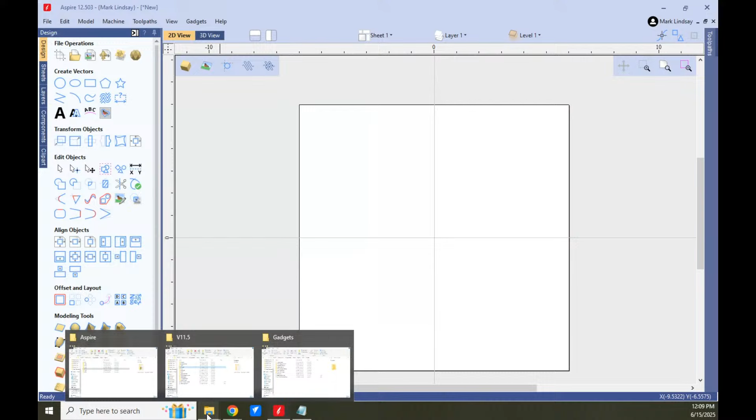I'm going to go to downloads, and there are a bunch of my... let me get down to them here. Come on, get down to them. There's one there, the square around gadget. There, I've got the install file here in my downloads folder.

So what I can do is go up to gadgets, install new gadget, and look, here are a bunch of the gadget installers that I have. Let's take a look. Let's look at the gear maker gadget. I can click on that, click open, and it's going to give me a license agreement for that gadget. I'll click agree, and it's successfully installed. Now close that. I come up to gadgets, and there is the gear maker.

Now, you were looking for the spirograph, 8th sinner. I can go over to the gadgets library, gadgets.vectric.com, and that's going to take you to the main library, and you'll choose, like in this case, version 12 library. Now I can scroll down and look for various gadgets right here. There's the square around gadget. Let's see, there are some others here. But you notice there aren't many gadgets here.

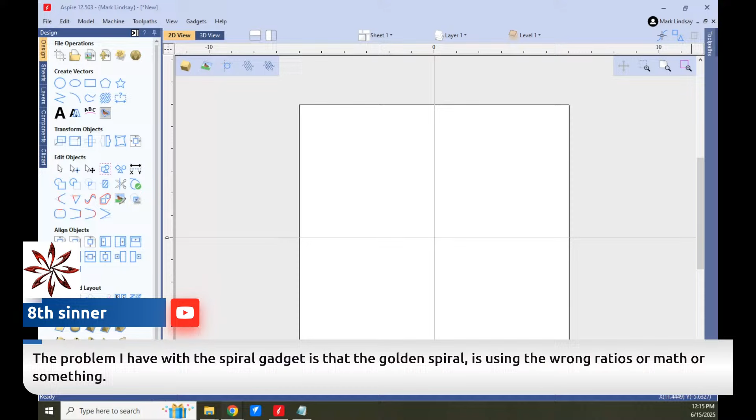8th sinner says the problem I have with the spiral gadget is that the golden spiral is using the wrong ratios or math or something. Yeah, that is something to talk about. Get into the gadget forums, the gadget request forum, and mention that. They can't fix something if they don't know it's broke.

I agree, the spiral gadget could be a little bit more clear on a few things. For instance, it's kind of hard to get an exact measurement, I'm using my hands like you can see me. Let's just go get it. There's the spiral gadget right here. It's very difficult to create a spiral with a specific spacing between each of the loops, and that should be an option added to the gadget. So, oh well, what can you say?

We have another question here from Butch Miller. I'll lead off with a version 12.503 question for when things get started. I see a shadow box at the bottom of the screen in the 3D view with instructions and a question mark at the end. How do we get rid of that?

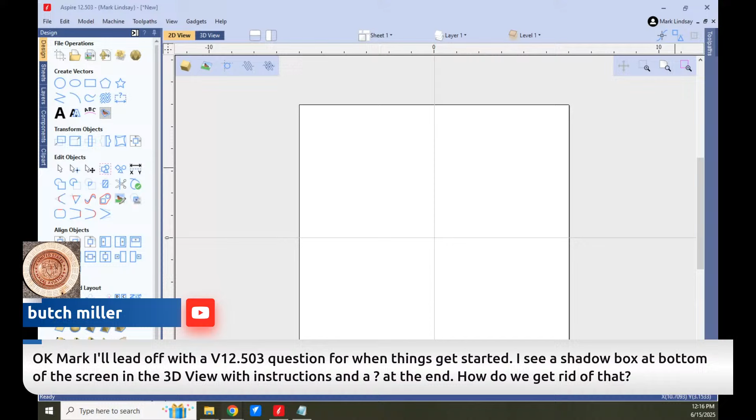Well, Butch, what you'll do is come over here to the 3D view, Butch is referring to this panel right here. Click on an object to select, click again to transform. Yeah, there are all kinds of different instructions down here. What you'll do is put your cursor over that question mark, and right here it says toggle prompts. Click on that, and everything is gone except the question mark. This is here for convenience.

If you are using a specific tool, let's go over here to the circle tool. You can view that selected tool's documentation by clicking this link right here, and it opened a browser page to the draw circle category. So if you have an issue and you'd like to explore this tool further, that's how you would go about it. You can view the selected tool's documentation by clicking on that little link right there.

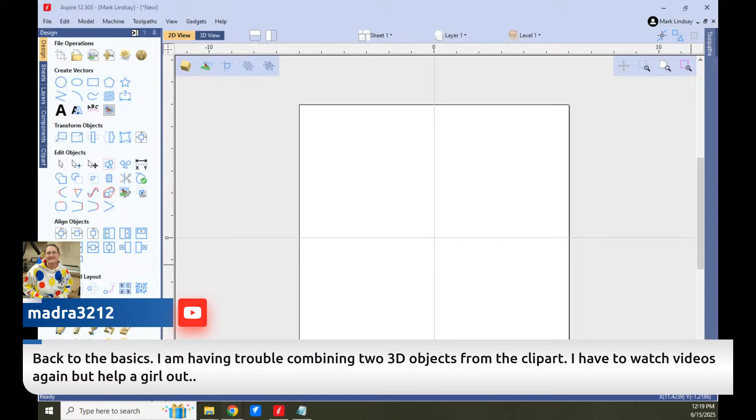Now we got Ellen asking, back to the basics. I'm having trouble combining two 3D objects from the clip art. I have to watch videos again, but help a girl out. Okay, Ellen, more than happy to, but help a brother out. Any two 3D components in particular, or are you talking about just in general? Because there are a lot of ways to combine clip art elements.

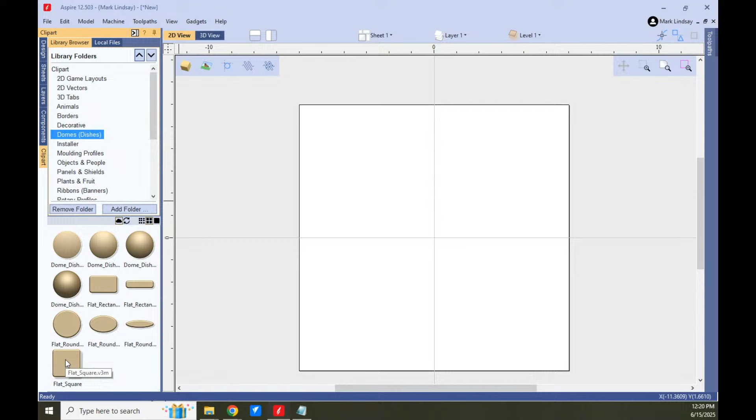I'll do probably the easiest here real quick. We'll go into the clip art. Okay, she says a rectangle in general. Okay, all right, well I'll pick out a rectangle. Let's go with domes and dishes. Then here's a flat rectangle. Let's do a flat square, it's basically the same thing, just all sides are equal. So I'll double click to put that square in the center of my material.

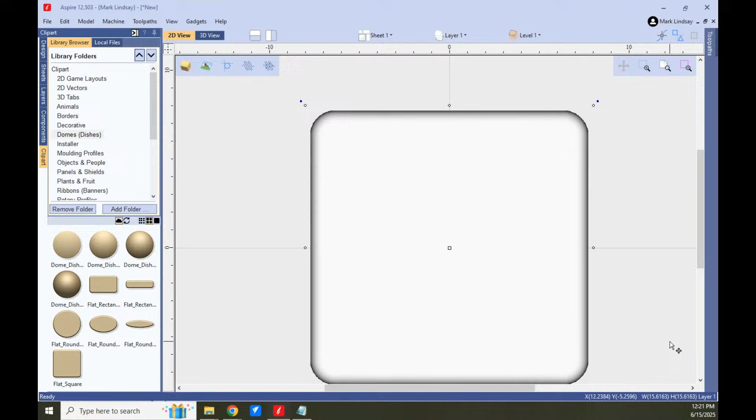Now, just a little bit of a cheat code here. This square you can see has rounded corners and a roundover on top. If I look at it in the 3D view, you can see it has rounded edges and a roundover on the top edge. If you need just a flat surface, it's very easy to go ahead and hold down Shift to anchor this at the center, and pull that out larger than my material. So now when I look in my 3D view, I have a large flat plane.

Now, something to remember is when you increase in size, it's automatically going to scale the Z.

So what I need to do is go into the Component tab, and I have the flat square selected. I can do this one of two ways. I can come over here to the Components tab, right-click on my flat square and go into Properties, or I can use these controls here.

Now, this is my overall shape height, which is the shape's thickness plus the base height. This is just the shape's thickness without the base height, and this is the base height without the shape's thickness. So right now, my base height is 0, my shape height is 0.705, so 0 plus 0.705 gives me a total height of 0.705.

If I want to change this, I can just click on that control, and you'll see it put a cursor down here in this blank. Now I can change my shape height. I'm going to change it to 0.25, then tap enter, and when I do, you saw it jump. Now that's only a quarter of an inch thick.

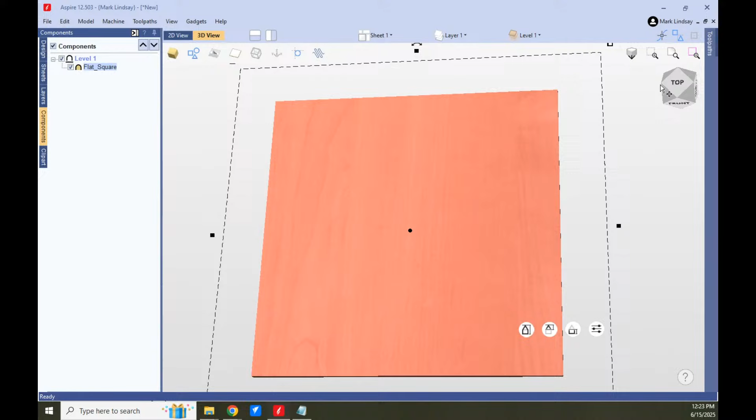And if I go into the properties up here, we can see that. I've got a shape height of a quarter inch, I've got a base height of 0. Now, combine mode is set to merge. I'm going to leave that alone for the time being. Close.

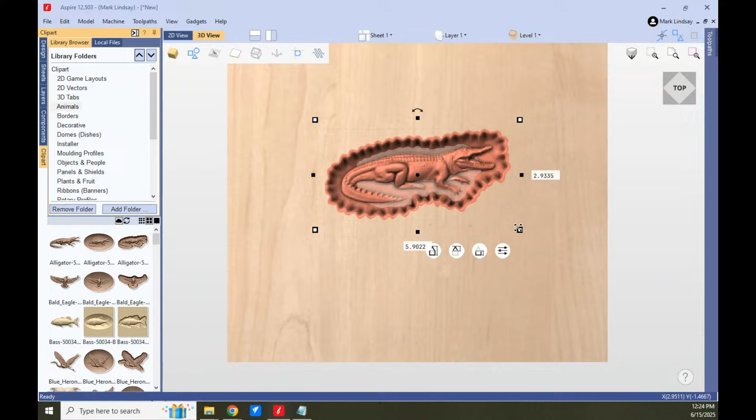And I'm going to go back to my clip art. Zoom out, and I'm going to click off. Now let's grab, what are we going to grab? We're going to go into, I don't want to go into the decorative, let's go into animals. And let's get an alligator here with a little bit of almost a free-form carving. We'll double click and we'll put that right there in the center. Now I'm going to hold down Shift and increase the size of my alligator.

Now, if we look at the edge here that's all red, this is part of this model. Now here's where we have to be careful. We can look and this looks nice, but if we rock it this way, looking at the front, come on. Okay, it looks like we did all right.

We see this kind of grayed out area here, but we see some parts of it sticking up, and they are in focus, let's say. We don't have this misty kind of look. This could indicate that this part of the model is sticking up higher than our model surface, our material surface here. So you have to be careful.

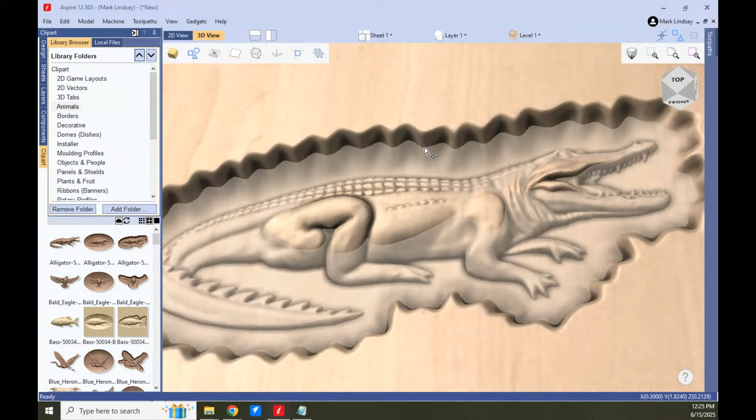Yeah, it's very, very close to sticking up higher than the material surface. So let me click on this, and we're going to look at our material height, 0.5561, and no base height. I'm going to bring that down to 0.5. So I'll click here, and I'll just eliminate this. Come on, go backspace and tap enter.

And that looks okay. Yep, that looks all right.

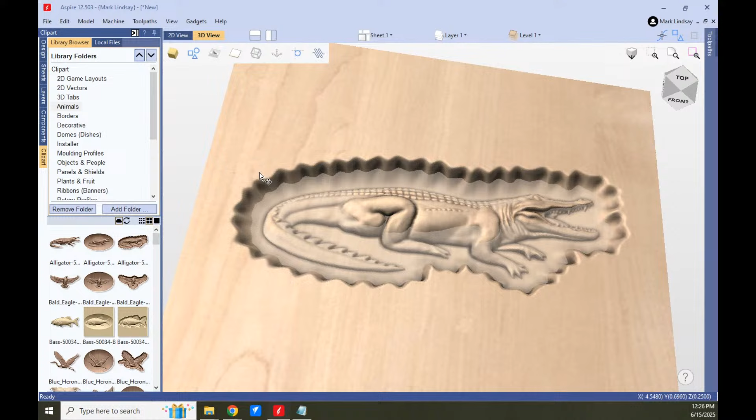Now, here's the important part of all this. The alligator has been added with an add combine mode. Now, if I switch over to merge, it virtually disappears. What we've got to keep in mind is the software models from the bottom up. So the first thing it's going to do is apply that flat square, then it's going to take the alligator and add that to the model.

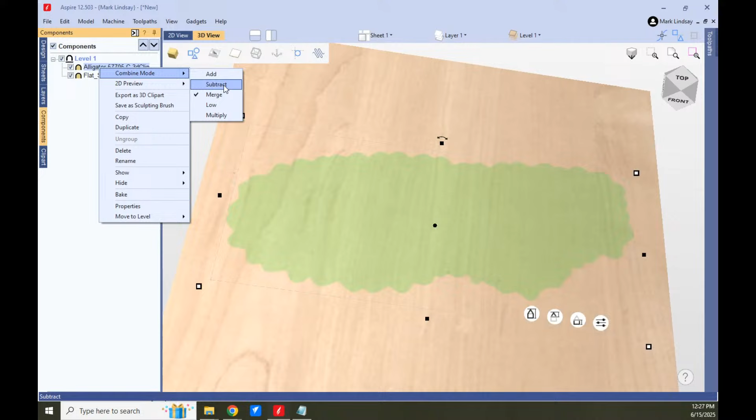The problem is I have the alligator set to merge, so it's merging with this flat plane. I don't want it to merge, I need it to add. But I'm going to play with subtract as well. Let's see what it does if we change the combine mode to subtract.

Now we have this sticking up off of our flat plane. If we look at the bottom, we can see that the model is represented, but it's sticking up above our flat plane, and the alligator is recessed into the model, or into its shape. So it needs to be set, the combine mode needs to be set to add. So that's going to give us this overall look, and that should carve out nicely.

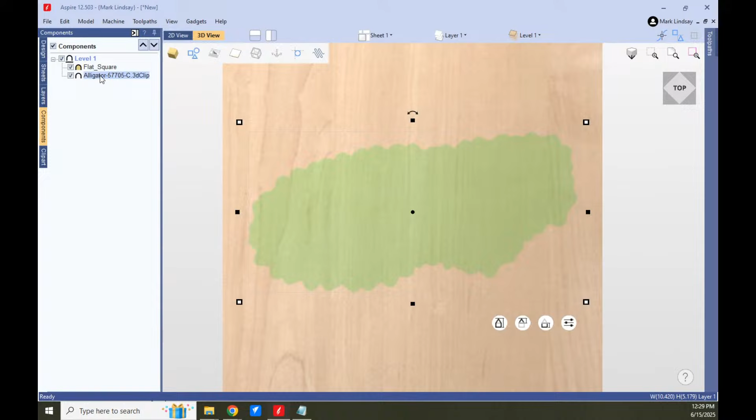Let me click back for a good top view. Now again, I said the software models from the bottom up. If I drag the alligator down so it's towards the bottom, it's still represented in this big plane, but it's the same as if the combine mode was set to merge. That's because the combine mode of the square is set to merge. Let me change that to add.

And I had rearranged the order. The order matters, so it just depends on what I want to model first. This is my base. I want everything either added to or merged with it, so I need to make sure that flat square is down below.

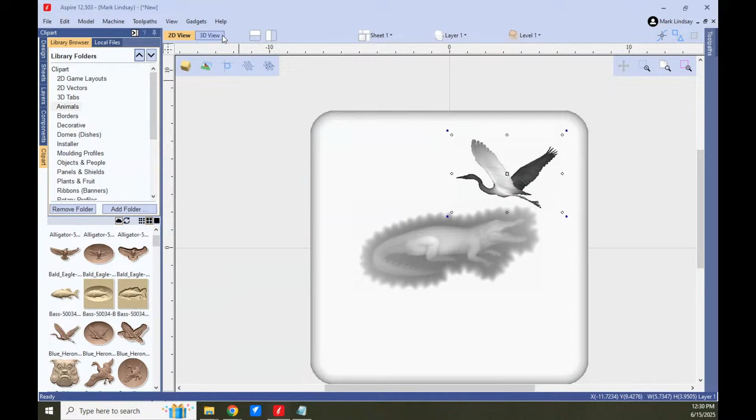Okay, and now we're looking good. Now I can come back into my clip art and find, let's take the blue heron over here. I'm going to do this in the 2D view. I'm going to bring this bird up over here. Nah, I should do it in the 3D view. I'll bring this bird over here, and I'm going to reduce it.

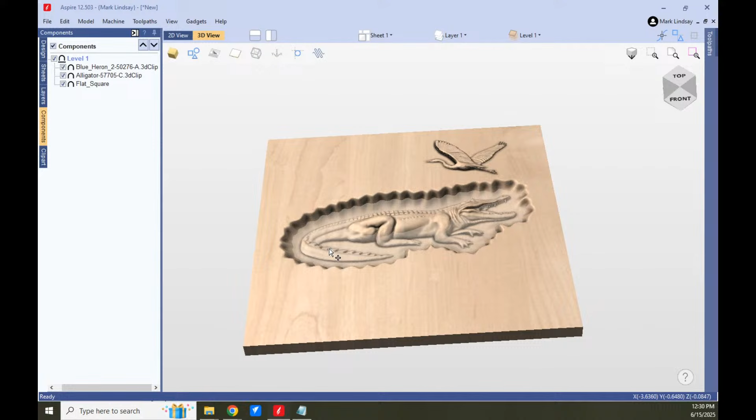There we go. Now we'll go over here into the Components tab, and the heron combine mode is Add. So I can click off here. My alligator is down here in his hole, but my heron is up on top.

Now Ellen says that's what I'm dealing with right now. I'm scratching my head saying, what am I doing wrong? Okay, the thing to remember, Ellen, is you want your model's base to be the first thing that you put in here. Then everything you want to add to this model needs to go on top.

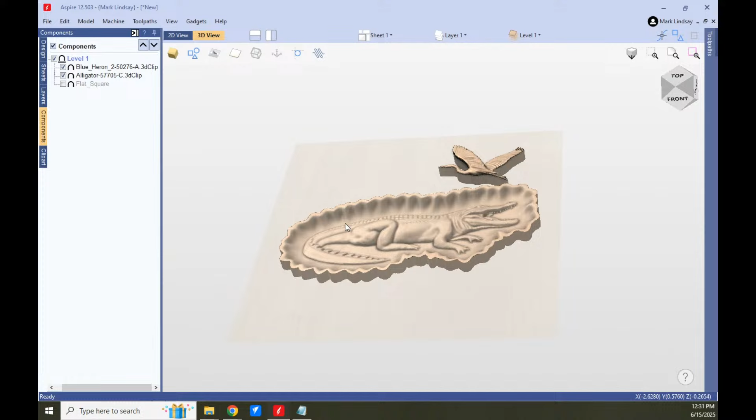Okay, now I could just as easily turn off this flat square, and I have my models, and they're all just fine. It's going to work the same way. Okay, my base is right here, my blue heron is right there, my alligator is right there. They would carve just fine.

But if I want that base there to be seen, there we go. So just remember, Ellen, your base needs to be the first thing here, whether it's a rectangle or whatever it is. Let's say we've got something else going on. Let me select all of this and delete. And we will delete. So I've got no components in here.

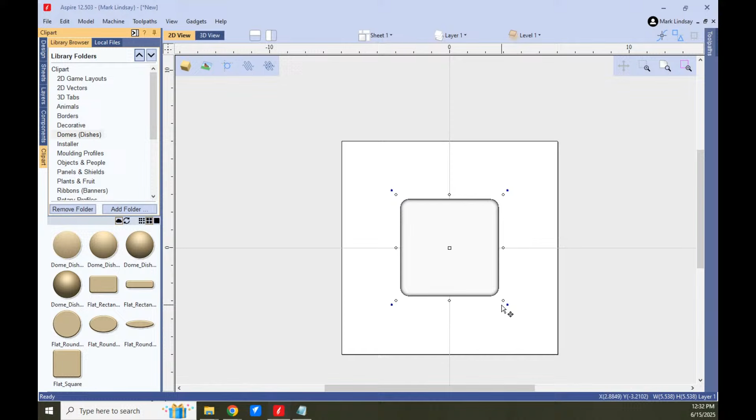Let me go to clipart, and I'm going to go back to the domes and dishes, and we'll take my flat square, hold down shift, and we'll go about like so. So I've got it right here. Everything's good.

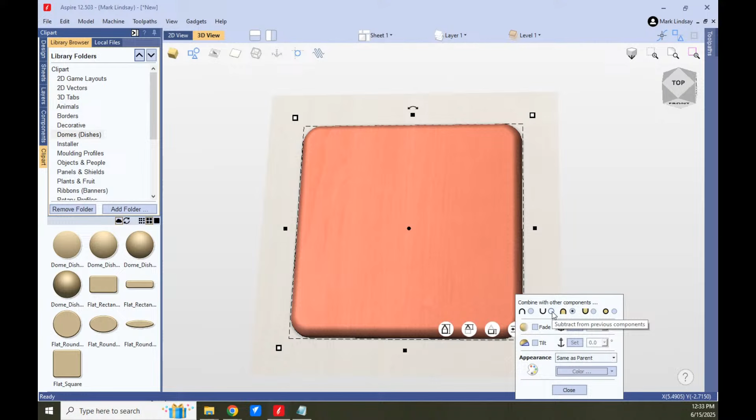But I want it to be a dish, I don't want it to be a dome. So I can go right over here to this icon, the last one to the right, click on it, and there are some of my properties. Now if I want this to be dished, I can click, and that has changed the combine mode. Now I can close it.

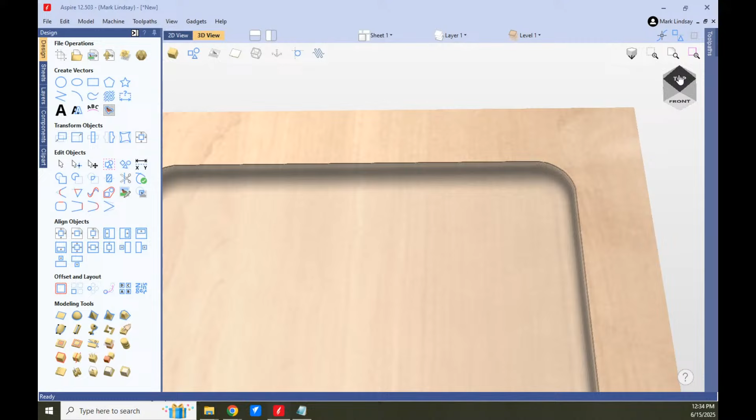Now again, when you're doing something like this, dishing out, we're going to get some jagged edges if we don't do something to clean that up. So we'll come back into the Design tab, and now I'm going to add a zero plane. In Aspire, I need to hold down Shift, then click this first icon, and that's going to fill in those jagged edges. Okay, so there's my dish.

Now I can put something else inside it. We'll go back to animals, and I don't want to play with Wally Gator today. Let's put a bulldog in there. All right, now I've got my bulldog, and I'll hold down Shift, make him a little bit bigger. All right, now I'm going to look at this, and oh my God, his chin is sticking up out of the model.

Well, now I've got a couple of things I need to concern myself with. First, let's jump back over here to the Design tab, but I want to look, my material's 3/4 of an inch thick. Okay. My dish, looking at my readouts down here, my dish is almost 3/4 of an inch thick itself. My bulldog is sticking up way above the surface of this carve. Looking at the front, you can see how far it's sticking up.

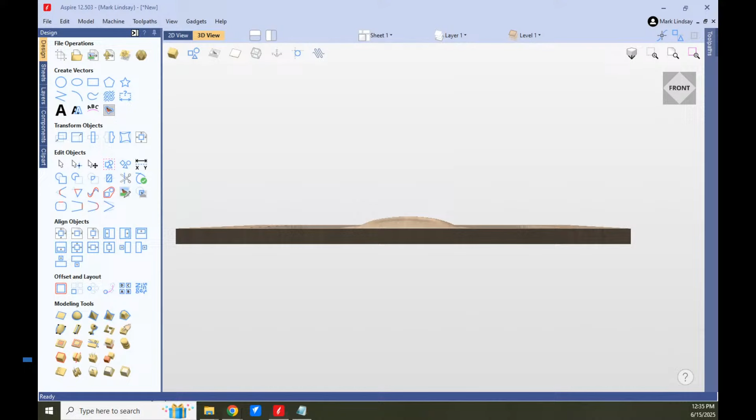Yes, the zero plane smooths the edges on a dish. It won't help you with the dome, just the dish. Okay, so now what I've got to do is figure out what's going on here. I've got a dish that is...

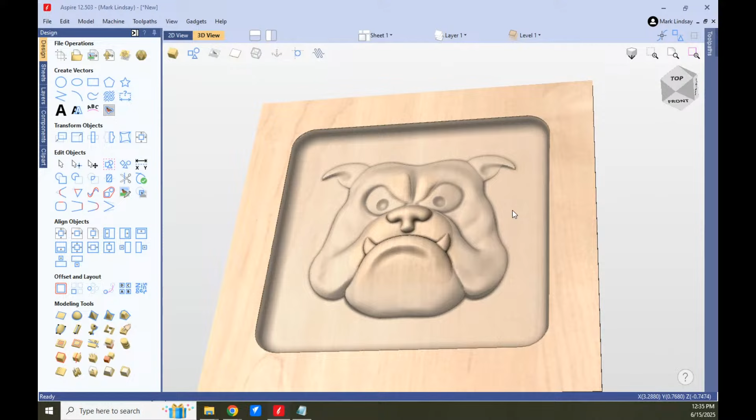carving way too deep. Now let me go right back up to the top here. Right down here it says, if we look at my readout down here, it says I'm 0.7474 deep. I'm going to show you something that'll help you out.

I want to know the thickness, the material I'm going to have left if I carve this. Well, all I need to do is hold down Control and, oh, that's only in the preview. Okay, so if I go over here and go into the preview, I have no tool paths. It's going to take forever to run tool paths for this.

After the tool paths are calculated and you're in the preview window, 3D view. Nope, back over, close that. There we go. Go back over here. If you hold down Control, a thickness will pop up, letting you know how much material you'll have left, but only after you've calculated.

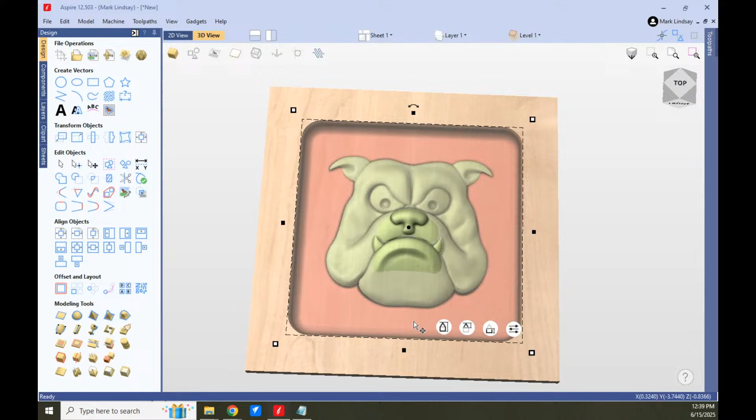Okay, now my dog, select my dog. His thickness is 0.7474. We need to fix that. Let's go with 0.5. So backspace, hit enter, and now just the tip of his nose is poked out there.

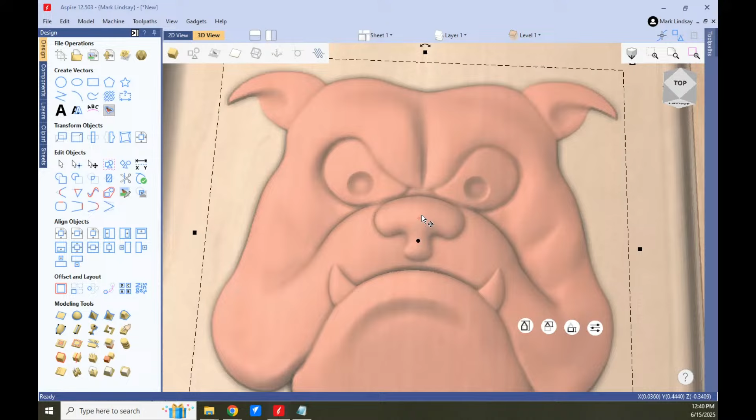So let's go with 0.499. I say again, 0.499, enter. The tip of his nose—okay, we're good now. So now if I switch over to the front, we've got nothing sticking up out of the way.

Okay? No, you can't pet that dog.

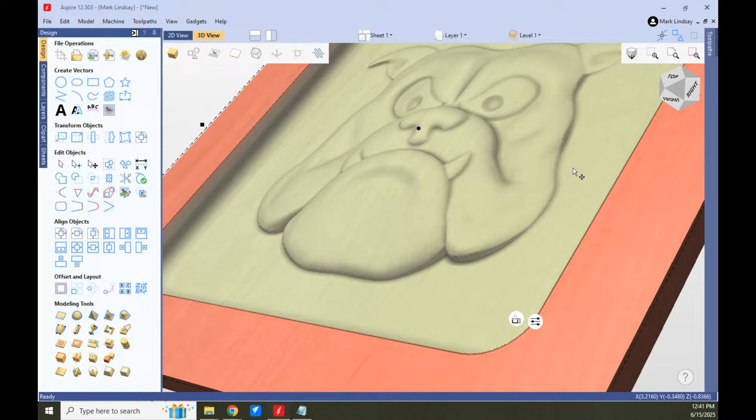Base height is the base of the model, not base of the material, correct? Correct, let me show you here. Let me switch over back to the top. Zoom in, I'm going to turn it this way just a little bit. If we look over here especially, we see we've got a nice smooth transition from the dog's face down to the dish.

There's a little bit of a, I call it a cliff right here, but not much. There's a bit that's a nice smooth transition right here. Okay, so now let me back up, click off. We're going to click on that dog. Now I'm going to add a base height of 0.25 to make it obvious.

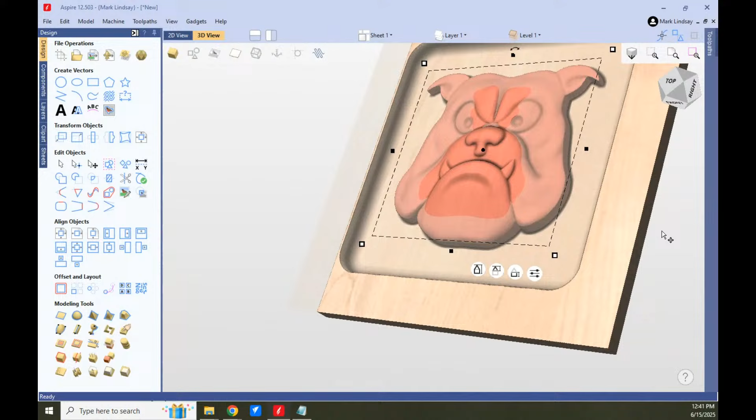Now you see how the whole dog raised up. What we've done is we've added a base underneath the model. It's lifted the model up. I'm using my hands like you can see. It's lifted the whole model up by adding a bit of base underneath the actual model. Now I can go back and undo that, and you'll see it drop back down.

Before I do—get out of that, I did not save that. Before I do, we have a base height of 1/4 inch, then we have a shape height of 0.499, for a total of 0.749. That's the total shape height—that's the shape height plus the base height gives us the total model height. I'm sorry, not total shape height, the total model height. So that's something else to watch out for.

Let me go back in here and bring that back down to 0. Hit enter, and now I'm back down to the regular dog height. That's dawg, D-A-W-G. If you're in New York, it's dog. But hey.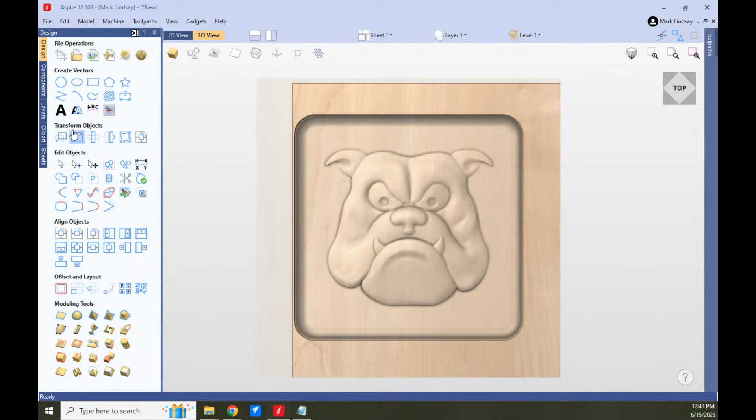All right, to go back to the component tree, you will see the 0 plane is its own component. The bulldog head is its own component, and it's on top of the 0 plane, and that's fine. The flat square is my base. My 0 plane somehow got moved off to the side. We can see the position right here. By clicking on it, I can go to X0, Y0, hit enter. My 0 plane is now centered on my material the same as the rest of my model.

I don't know how it got moved over, but I want this order because I want this 0 plane applied to this dish. Okay, so the 0.25 of the base height that I had, starting where? It started at the surface of this dish, in this case. It starts here, and this sits on top of it.

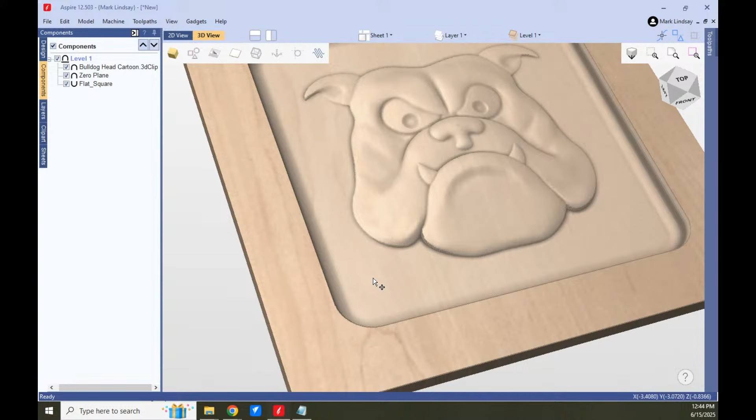So now I can—hello, there we go—take an ISO view of it. I have no base height. All right.

You'll also notice that the zero plane has its own layer. This doesn't really affect much of anything here in the 3D view. I can turn it on, you can't really see anything, turn it off. This really comes in over here on the 2D view.

Remember, a zero plane is a flat plane with a thickness of 0 that sits at a specific spot in the model, but it also has a layer. If we turn on the zero plane layer in the 2D view, that's what happens. If we have any vectors under the zero plane, they can get obscured. The default is the zero plane turned off, so you can have any vectors out here visible. If it becomes necessary to look at the zero plane in the 2D view, this is how you turn it on.

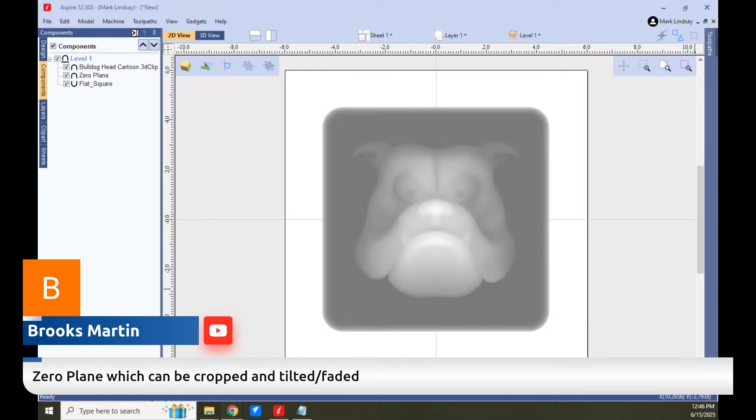Marie says that's so weird because you don't have a tool path for the zero plane, right? No, there is no separate toolpath for the zero plane, and this is an important point. The minute you add a zero plane, it becomes a part of the model. Looking at the 3D view, that zero plane is a part of the model.

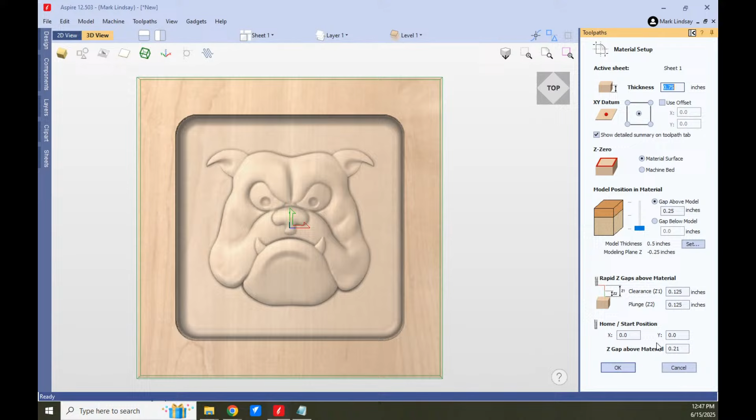So for instance, this matters if I come over here to do a roughing toolpath, which in this case I'm going to do simply because I've got a lot of material to cut out here, and it's faster to do it this way. It's going to take me into material setup. I've got a total model thickness of a 1/2 inch, that's fine. My Z gaps and all that other are fine. Now it's going to bring me into the roughing toolpath.

This matters that the zero plane becomes part of the model when we get over here to the machining limit boundary. If you are going to machine to the model boundary, remember the zero plane becomes part of the model. If you put a zero plane in, your entire material surface is part of the model, so it's the same thing as the material boundary.

That's only if you have a zero plane. Now you can mitigate that by adding a vector out here, and you can machine to the selected vector. So you can limit that. If you don't want it to cut out here, you can machine to the selected vector by adding a vector out here.

So Michael Ludwig is asking, if you tilt the zero plane, can you flatten on an angle? Yes, but there's a little bit more to it than that.

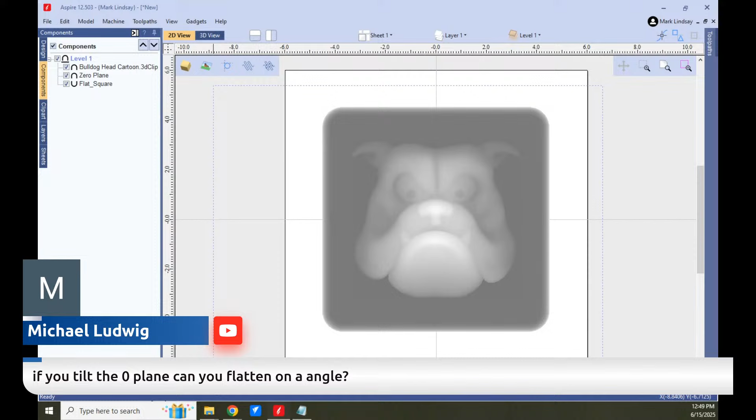Let me go over here and I'm going to get rid of all of this. We'll delete my dish and my dog, and I just have a zero plane, that's all. So I'm going to select it, let's go back into the 3D view.

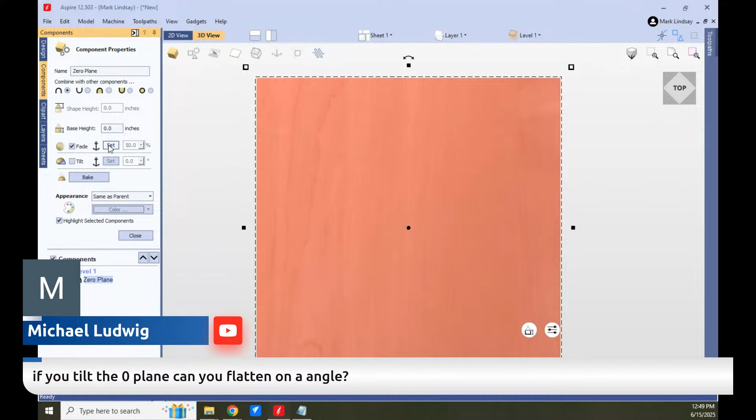And I'm going to right click it, go into properties. And now what I'm going to do is fade this, set, and I'm going to go straight across. Now I'm going to set an angle of 35 degrees.

Okay, now if I look - oops, I went the wrong way. Yep, I went the wrong way, that was a fade. Set. Back up to the top here. Okay, 35 degrees.

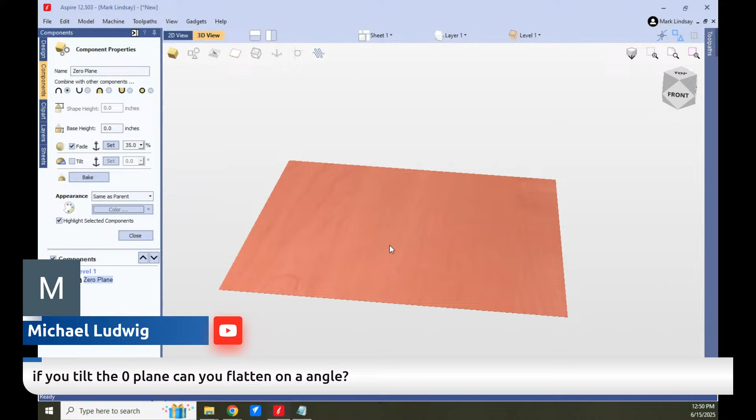I'm going to try a tilt. Set. Come on, straight across. There we go. Nope, it didn't take, come on now. All right, now we'll go. There we are. So now my zero plane is on an angle.

Yes, that's right, that was a percent, that was not a degrees. You're absolutely right, Brooks, thank you, I didn't see that. Okay, there's my angle. Now that's a whole lot.

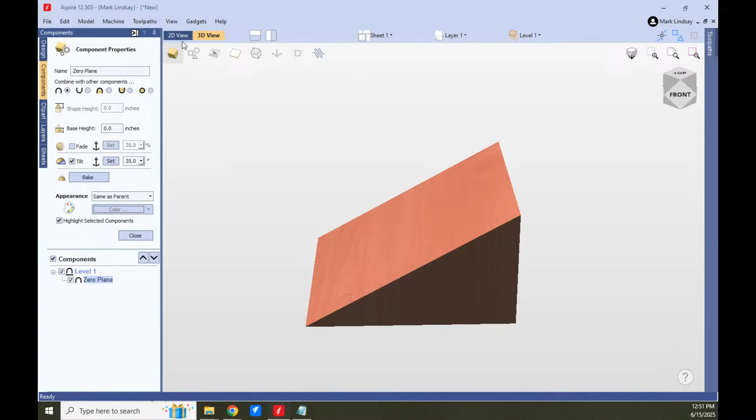Let me go into the 2D view, and we'll go into the design tab here. And I'm going to draw a rectangle. All right, my 3D view, turn on the vectors. There's my rectangle, I only want that rectangle tilted like that. Let's go back to the 2D view. Now we'll go to the 3D view.

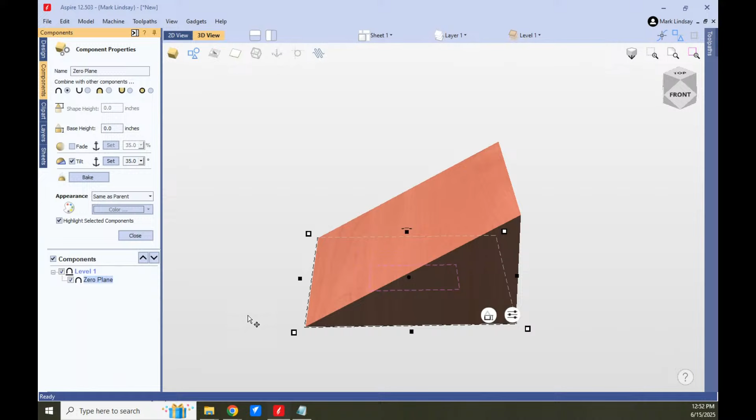We're good. I'm going to go into the Components tab, select the zero plane. With the vector selected, I'm going to go up to the level, right click, go to Clipping, apply. Now suddenly only that area, if I turn on my zero plane layer, only that area is selected. Go back into the 3D view.

Now, obviously, that's way, way, way too tall. But I've got a shape height of 0 and a base height of 0.

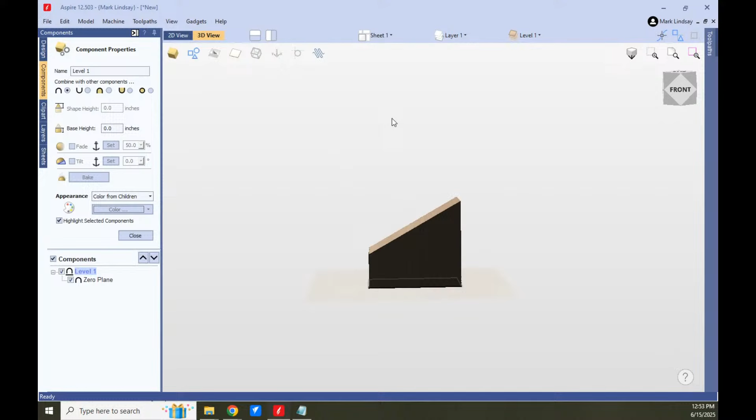This does come in handy, believe it or not. Let's say I was playing with this once. I was trying to do a square recess that was sloped. I'll have to dig out that file and show how I did it because I don't remember how I did it right now. So that's something I'm going to make a note of right here.

I did a video a few years back about making a tapered hole. It was a circle using the molding toolpath, and people were asking, can it work for a square? Well, this was a workaround for that, but I've got to remember how to do that.

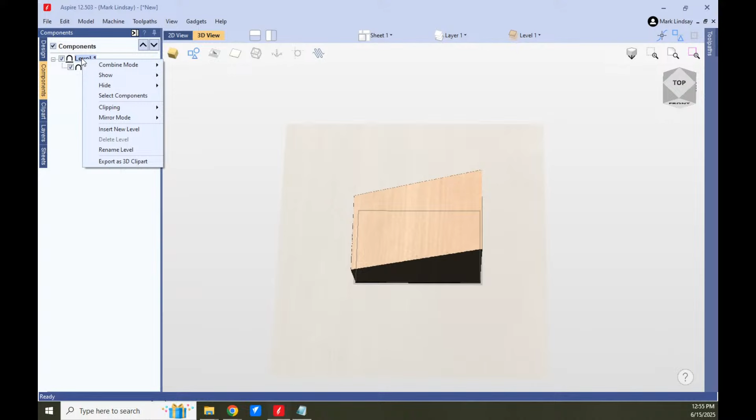So I have to go back and find the file I was experimenting with. Let's see, tapered, square - I'm writing myself a note. I really don't remember how I did it. Oh my God, that's frustrating. Okay, I'm going to take that clipping off, remove it. And I know it wasn't that drastic of an angle, but I don't remember what it was.

It can be handy. It came in handy for me when engraving some limestone, which wasn't flat. I got the text V-carve at equal depth.

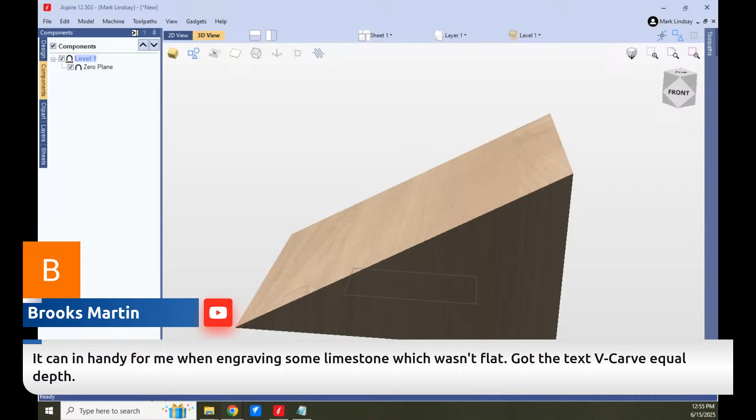Yes, yes, okay, Steve is right there on the spot with the carving a tapered hole video. This I don't have a video on - I was playing around with it behind the scenes and was going to do a video on it, but that never came to fruition. So there isn't a video on that.

But yes, the point is the zero plane can be set at an angle, and it can also be trimmed. If you're using Aspire, you can. Did I get rid of the zero plane? Yes, I did. Okay, back to the design tab.

To get a zero plane, hold down control - this is in Aspire - hold down control and click on this first icon to create a flat plane. Oops, I didn't do it right. Hold down shift, not control. Hold down shift and click on it. Then you have a zero plane.

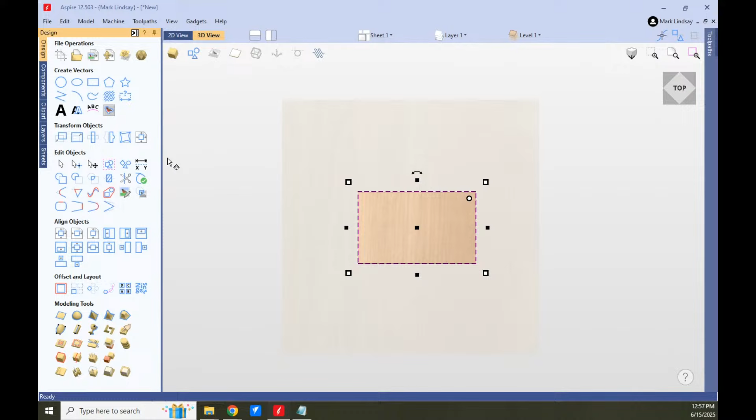In Aspire, I can select that zero plane, select the vector, and clear everything outside of that vector, so I've only got a zero plane right there. Now, if I come over here to the component tree, click on that zero plane, right click to come into the properties, I can fade it.

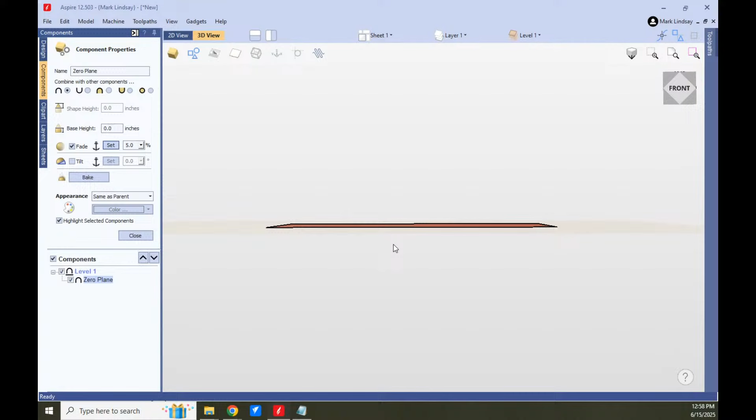So we're going to go - I think I'm remembering how to do it. Let's click off. Okay, want to fade, set, want to go from here to here. I want to fade down, say 5%. All right. And I don't know if you can see - you can just barely make out a little bit of an angle there.

Let me go for something more drastic, so I'll Control Z. Let's go with 50%. Set, and we'll go - I'll go from here to here this time. The second one, boom.

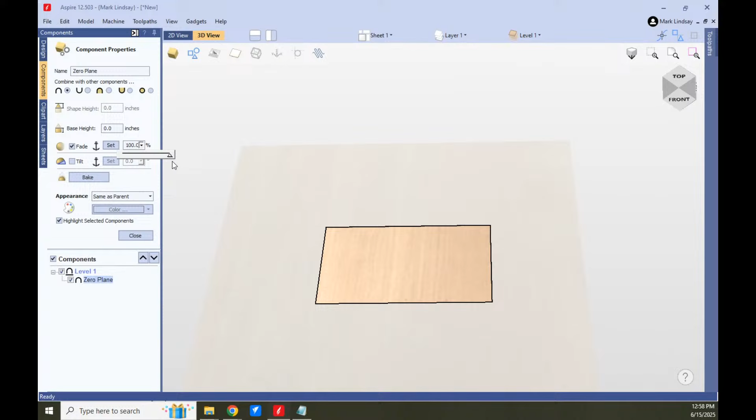Why is it not doing anything? Well, I'll try a tilt - maybe it just doesn't like me. All right, that's fine. Select the component. Set will go from here to here, and we'll go down 10 degrees.

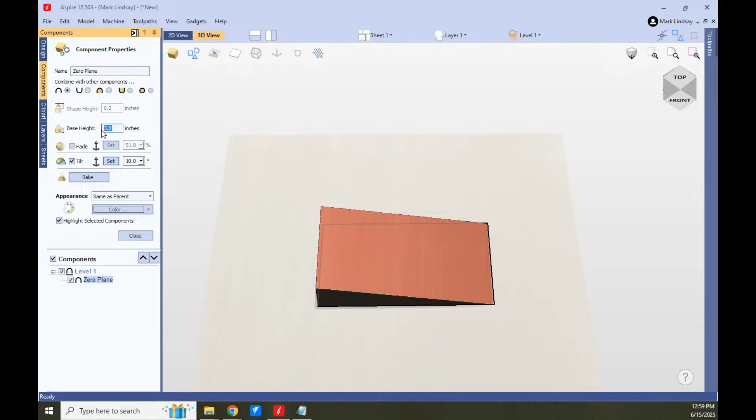That's still not what I want, but that's all right, this too shall pass. I'm going to give it - well, it's got a shape height - let's go with a base height of -0.75. Let it catch up. That's more along the lines of what I'm after. I'm going to make that an inch, negative 1.0. There we go, that's more of what I'm after. So now I have that slope.

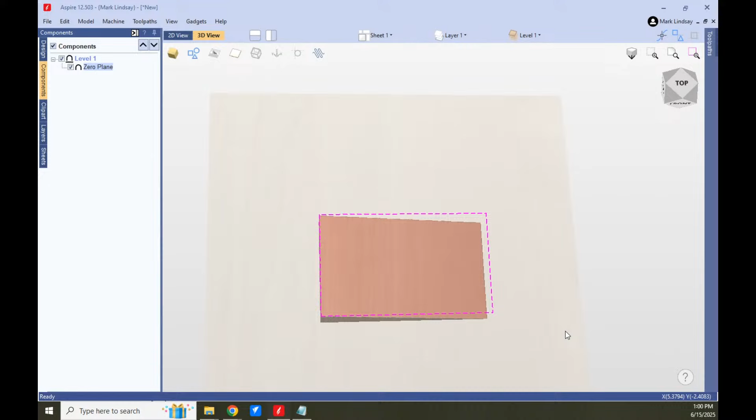All right, let's see here. We've got some other questions I need to go ahead and get to. Close - I will go back and track down that video, or track down that file. Let's see, we had another question here. I hope that answers your question, Ellen. I know I went a lot further than I may have needed to go.

8 Center asked, is there a way to add STLs to a custom library in clipart? I can add SVGs and JPEGs, I think even PNG, but with STLs, I need to import them individually. Would be easier to go through the app, though.

8 Center, do you have VCarve or do you have Aspire? If you have VCarve, you will unfortunately need to import them individually. If you have Aspire, I'll show you a nifty workaround. But I need to know if you have VCarve or Aspire. You have VCarve - no, then you can't. You will have to import the STLs individually. If you had Aspire, you could import an STL, then come up to Model, then export as 3D clipart.

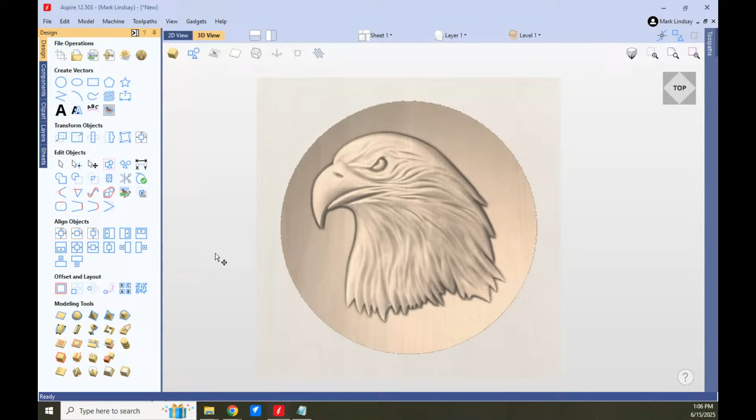So they know that people are going to do that kind of thing, so they take steps. If you want to create a 3D model, you need to have Aspire or another program to create an STL with. So back to the importing of a double-sided job.

Let's see here, it's not difficult to do. You have VCarve, let me load up VCarve. And as soon as it loads up, we'll get into this. We'll create a new file. I'm going to make this - that's fine. I'll make my height 24, and my thickness 2 inches, just for giggles. I don't need all this, but I'm going to use it. And because we're looking at 3D files, we're going to go very high.

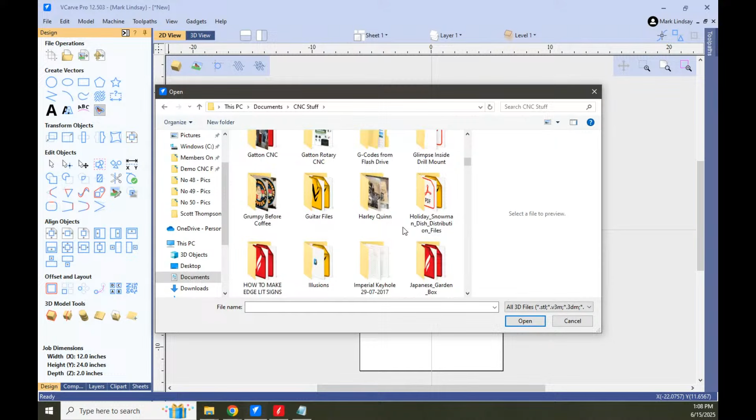All right, now I want to import a model - import a component or 3D model. And I want to go... I know which folder I want to look in. I only hope I have it on this computer. If not, this is going to be a very short demo. And a mistake I made before I even get there -

This is a double-sided job. Material surface on both sides, and I'm going to flip side to side. Now I want to enter a 3D component. I'm looking at my top, and I can tell that because it's white. Now I want to import the component.

Let's go to Documents, CNC stuff. Now I've got to scroll down here and find this particular STL file - and boy, do I have a bunch of junk in here. All right, here we are. And let's find... there we are, an owl statue. So it's going to take me directly into the import screen. Okay.

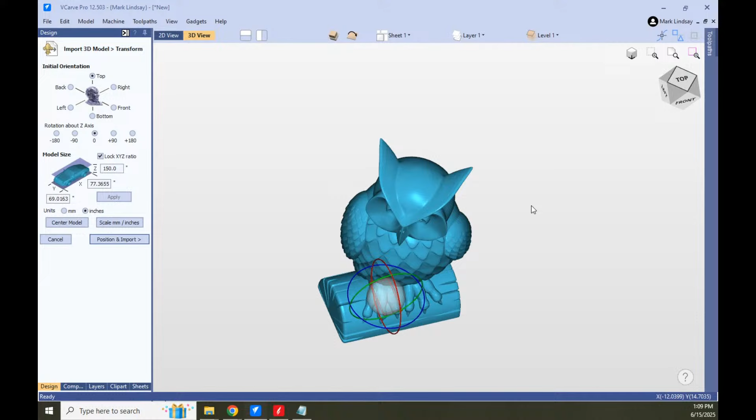Now we want to get into orientation. You can see my block of material right there. I'm looking at the front of the model. Our orientation is not good. I need to lay this model down.

So let's look at, do we want to orient it to the right? No. Do we want to go to the front? Front might not be bad. I think the front's going to work. So I've got my owl facing the same direction as I have my material here.

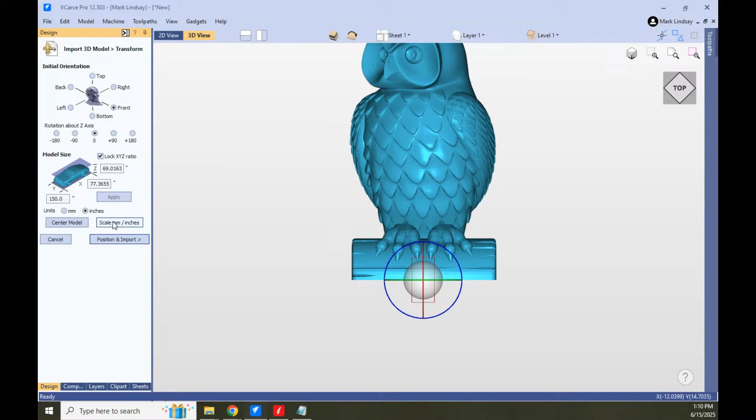It is way, way, way too big. If I look at my numbers over here, that's because it was obviously created in millimeters, not inches. So I'm going to scale millimeters to inches, and that's much better. I don't have to make it that small. Let's, well, yeah, my Z is pretty thick. All right.

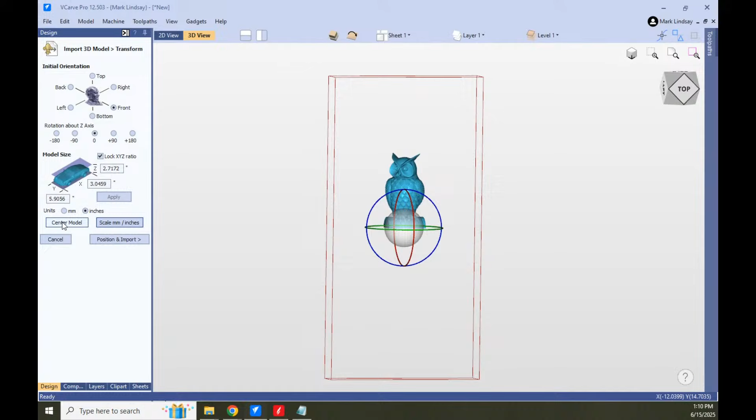Now, this is just scaling it and getting it into position. I'm going to center the model to make sure that I have everything okay. All right, now, so I've got it imported correctly. It's oriented correctly.

Now I'm going to go to positioning the model. This is positioning the model along the modeling plane. This is my top. This is my bottom. What I want to do is I want to create both sides.

Now I'm going to put in an overcut distance. What do I mean by an overcut distance? If I were to leave this plane with no overcut, what's going to happen is my bit's going to come down here and it's going to stop right there. And it's going to leave a little radius where that bit ended.

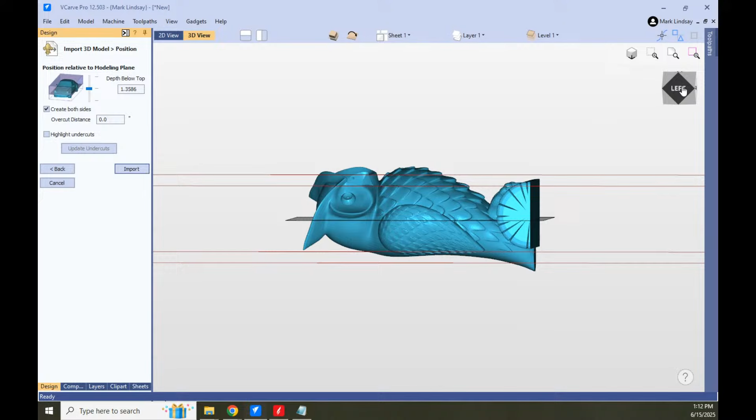Then when I flip it over and go to cut the other side, let's flip it over. There we go. No, I didn't want to do that. Let's flip it over. I want it upside down. There we go. When I flip it upside down to do the back side, the bit's going to stop right here as well, leaving me a radius here and a radius here, leaving what's going to look like a seam of flash along this plane.

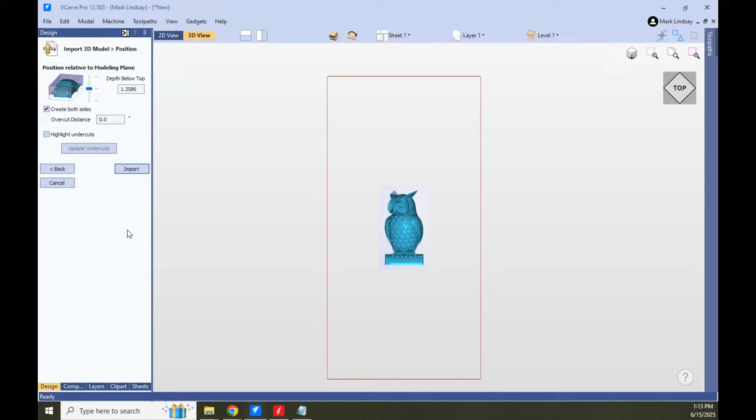Let me get back over to top here. There we go. So what I'm going to do is I'm going to put in an overcut distance. The overcut distance needs to be at a minimum the radius of the bit you're going to be using. If I'm going to be carving this with an 1/8 inch bit, the radius is going to be a 1/16 of an inch. I'm going to use an overcut distance of an 1/8 of an inch because I want that bit. Let me roll this again. When I cut, I want that bit to come past this plane by an 1/8 of an inch.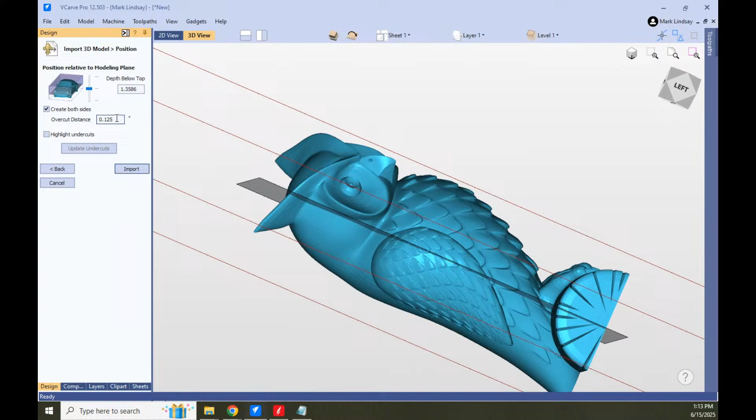So we'll go here, 0.125. I'm creating both sides. My modeling plane is in the center of my model. I've got an overcut distance. Now I'll import.

Now I'm looking at the top of my model. And you see that little gray ghosting right here. This is where that modeling plane was. This is where that bit's going to stop. It's going to carve all the way down to this area.

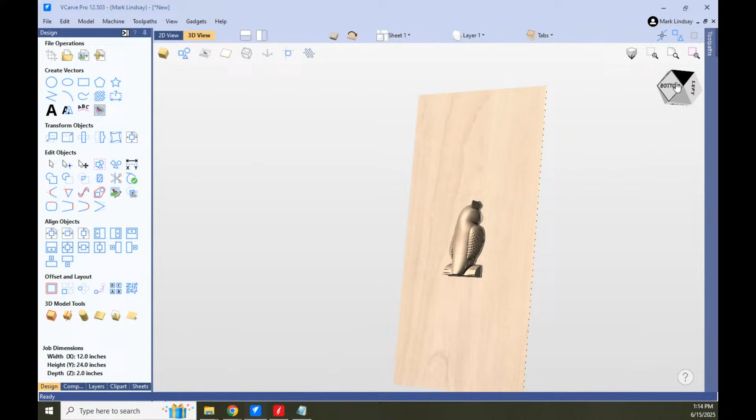Go back to the top, and now I'm going to flip the material over and we see the bottom. We see that gray area there. It's going to carve beyond that as well, down to this plane. And what that should eliminate is that cusping you get from the bit carving straight down to that modeling plane.

Again, I'm using my hands like you can see. So that's how you import a 3D model for a 3D carve in VCarve.

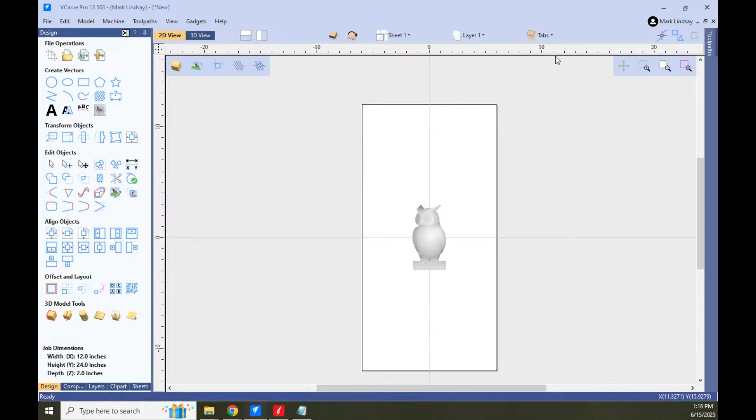Now, this is something that I have not yet found in any documentation, and it needs to be pointed out. When we're over here in the 2D view, we can tell which side we're looking at by the color of the scales over here. I've got white scales. That means I'm looking at the top. If I flip it over, I'm looking at the bottom, and I can tell because the scales are orange. Flip back to the top, grayish scales. But if I go into the 3D view, it's not so apparent.

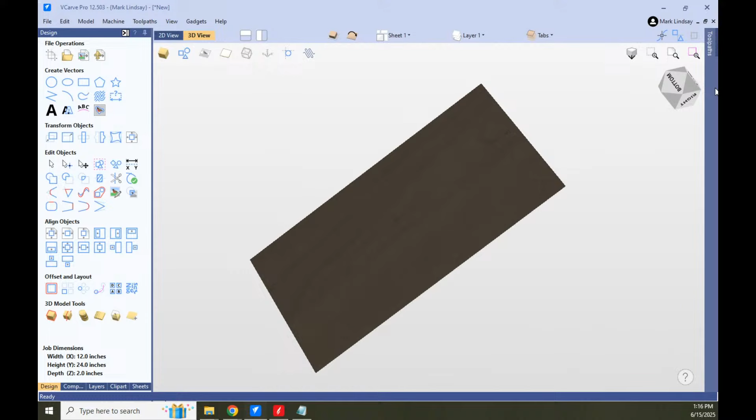I'm looking at the top because I know I'm looking at the top. Now I'm looking at the bottom. I know that because I know I'm looking at the bottom. But, quick, what side am I working on? There's the bottom, but it's blacked out. How do I know what side I'm looking at?

Well, you can tell only right here on the top of the cube. That's the active side. You see that black line around that square that says bottom? You see that heavy black line? Now, if I flip it over to the top, there is no black line. That is the only way you know whether you're working on the top or bottom in the 3D view.

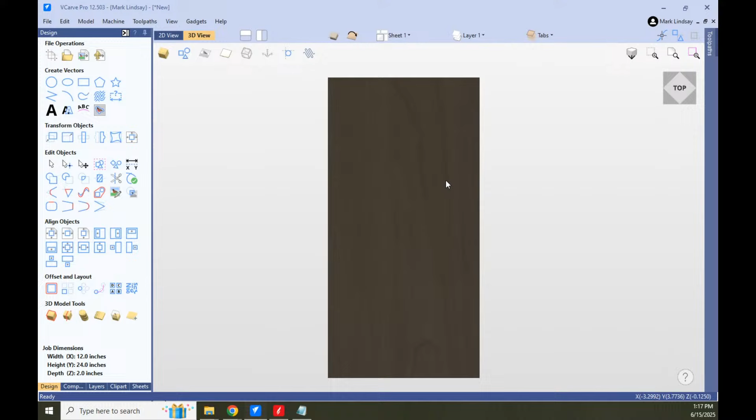It says so on the top right view cube. Yeah, but I've got it says top, but this is all blacked out. How come I can't see any of my vectors? Because this is not the active side.

If I go to the bottom, that black line around that diamond that says the word bottom has that dark line. That is the only way you can tell what side you're actually working on. I'm on a one-person quest to get them to at least color that diamond the same color as the scales, so it's a lot more apparent.

I did not know anything about that line until about 2 months ago. Didn't know a thing about it. Haven't found it in any of the documentation, haven't found it in any of the videos. It's not been mentioned. So I'm on a one-person quest to at least get them to fill in the color of the active side on, I call this the meatball, the active side of the meatball, so you can tell at a glance which side you're actually working on, same way they'd have it in the 2D view.

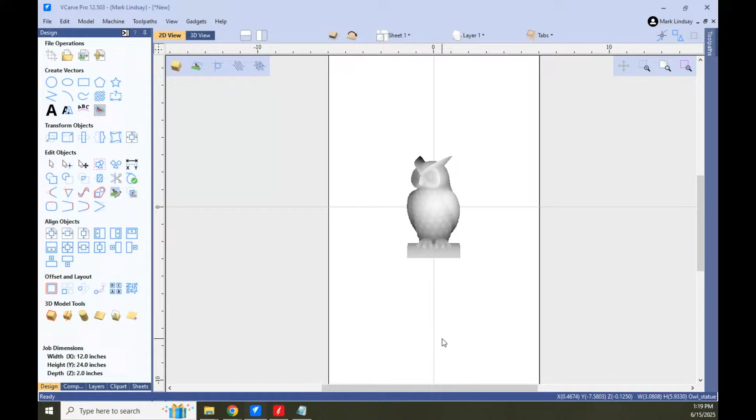I just wrote myself a note. I did a video a couple of years back on the difference between 2D, 2.5D, and 3D. I'm going to get a link to it, and I'll post it in a pinned comment and in the description of this video.

Some folks are saying that a true 3D needs a fifth axis and all this other stuff. If you come from a machinist background, that is probably true. I don't know anything about machining metal, so I don't know what machinists are taught. But when it comes to this...

Again, bas relief carving, a 3D cut is any cut in which all three axes are moving simultaneously.

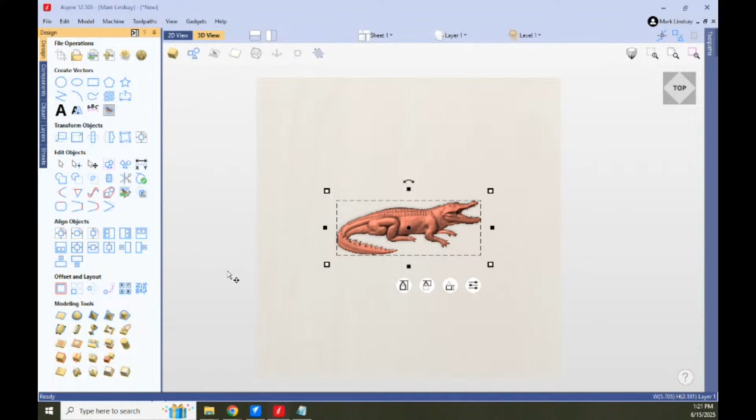So if I go back over to Aspire and let's bring Wally Gator in. Where's Wally? You Brits know, if you know, you know. Well, you know the Where's Wally part, but you don't know the Wally Gator part, because I don't know if that cartoon ever made it across the pond.

In the world of bas relief modeling, this is a 3D carve. This is a 3D carve because all three axes move simultaneously when carving it. A 2D carve is just cutting a shape.

If you are cutting this out, cutting a hole or cutting out the circle, that's a 2D shape, that's a 2D carve. If you are cutting a pocket where the Z plunges, I'm using my hands here, if you're cutting a pocket where the tool comes down to a certain depth and then moves, that's 2.5 dimensional.

If you're carving Wally Gator here, for example, and all three axes are moving simultaneously, that's a 3D carve. It does not have to be like this, where you're cutting all sides. That is not this, although it is a 3D carve, just the fact that you're carving the front, back, and both sides, top and bottom, just that does not make it a 3D carve. This is just as much a 3D carve as this is.

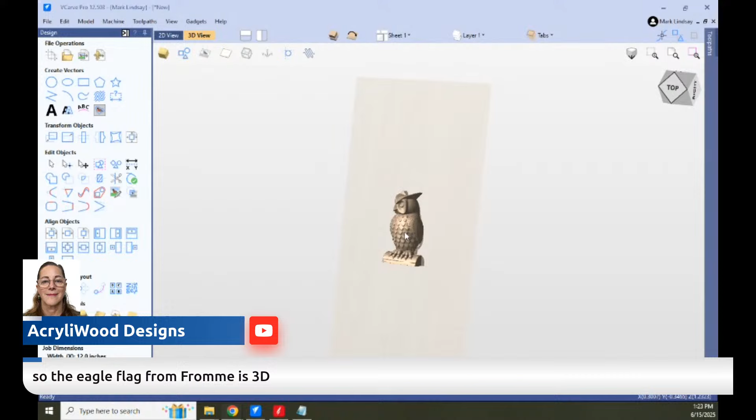I apologize. This is just as much a 3D carve as this. Okay? Again, we're talking bas relief. We're not talking machining parts.

A bowl can be 3D. Again, if you're making a bowl using a bowl and tray bit, your Z just drops down to a certain depth and cuts out that entire bowl, leaving you a nice, radiused bottom, and it carves out the whole bowl. That's a 2.5D carve. If, on the other hand, you're using a ball nose bit to carve out using a 3D tool path, that's a 3D carve.

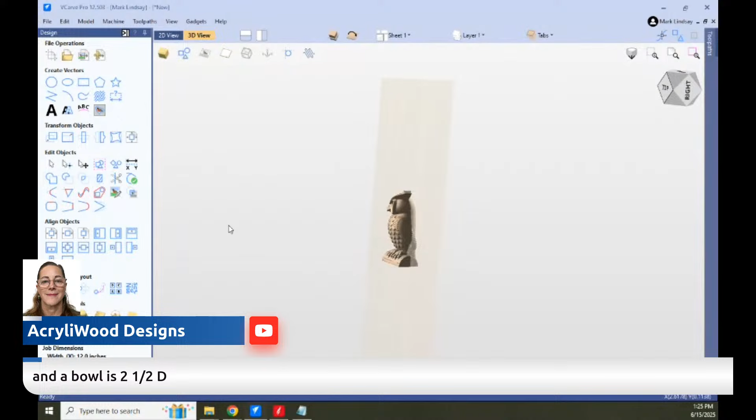Again, because all three axes are moving simultaneously. When X, Y, and Z are moving at the same time, that's a 3D carve. That's hard for some people to wrap their head around. They only consider something like this to be a 3D carve. It is, don't get me wrong, that is a 3D carve.

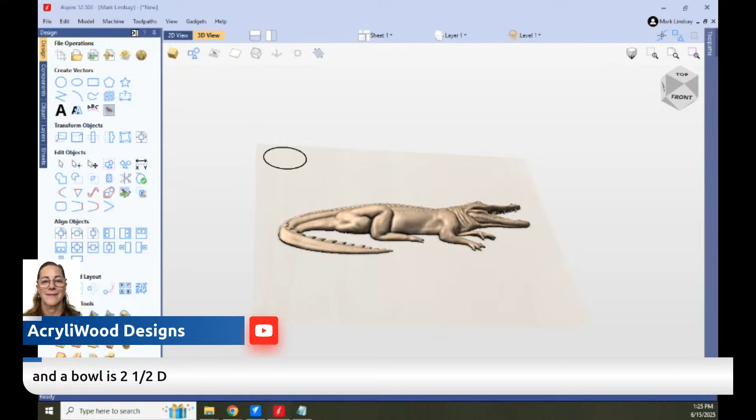But so is that, so is Wally. Again, the definitions are different from bas relief. I'll link that video about the difference between 2D, 2.5D, and 3D in a pinned comment and in the description.

So we're going to wrap this up. I believe I got to all the outstanding questions. Yes, I did. Bas relief is the type of carving that this is. Let me get you a good definition.

BAS-RELIEF. Bas relief is... come on. Okay, oh man, come on now. Give me a good definition of bas relief. It's a noun in sculpture. Don't give me examples, give me a good definition.

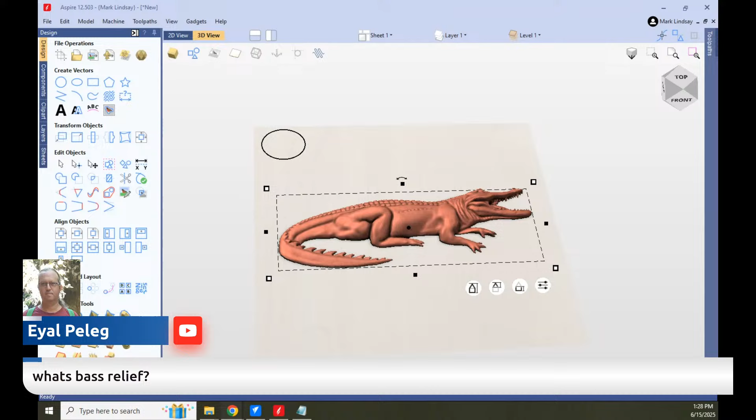That is high relief. This is not bas relief. This is bas relief. I say that because either this is carved away and that's left on the surface, or this is carved into the surface. Although the modeling type, the carving type used, is bas relief, this is not a bas relief piece because this is meant to be cut free and left standing up. This is a high relief.

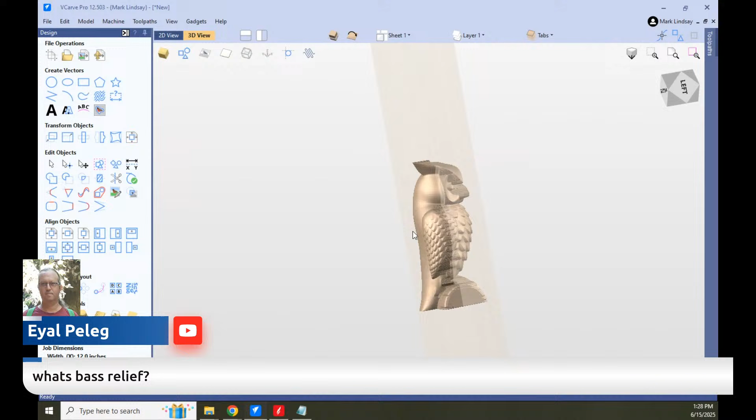All right, let's go ahead and wrap this up. Okay, there we go, Brooks Martin: 'Alto relievo, high relief, approaches 3 dimensions, while bas relief at times is more akin to 2-dimensional drawing.' Yeah, kind of, but not really. Oh, I didn't mean to highlight that, but you're welcome, Marie.